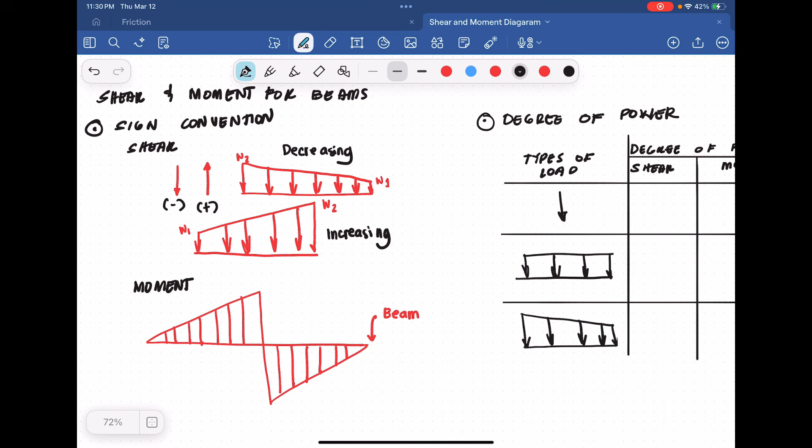Now when it comes to moment, what does it represent when we see this kind of figure? Let's say this is our beam or our horizontal axis. If we encounter a figure above the beam, it means it is on the positive side or positive area, and it is increasing in value, starting from 0 and going to an unknown value.

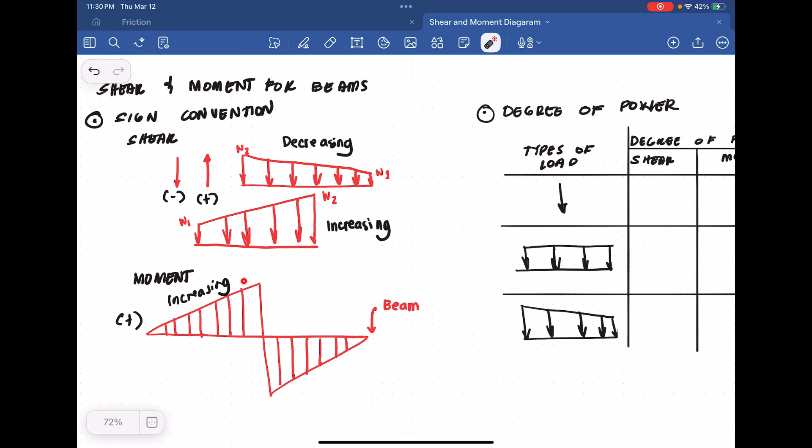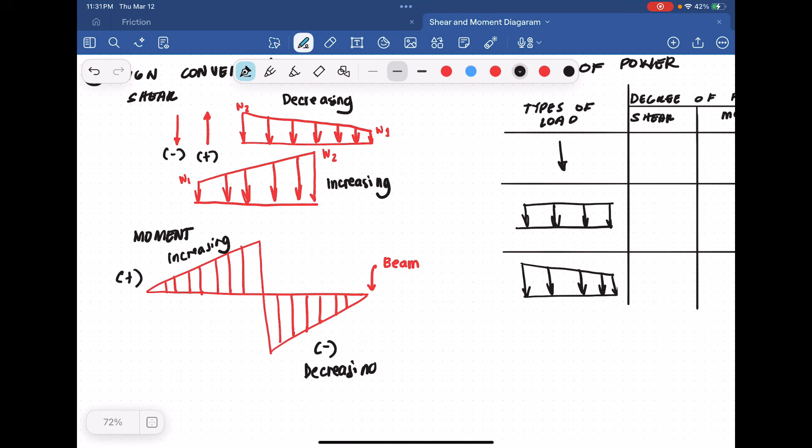While here, when the shape or figure of our moment is below the beam, it means our data is already on the negative side or negative area, and our value going from a higher value towards 0 means it is decreasing in value, heading towards 0. So that's our sign convention.

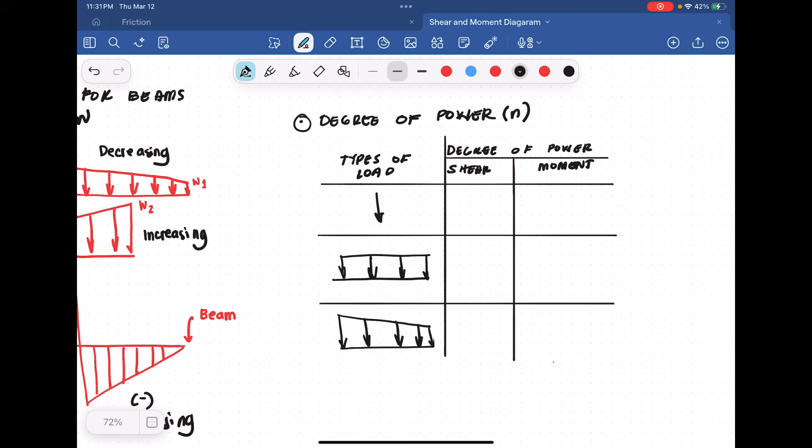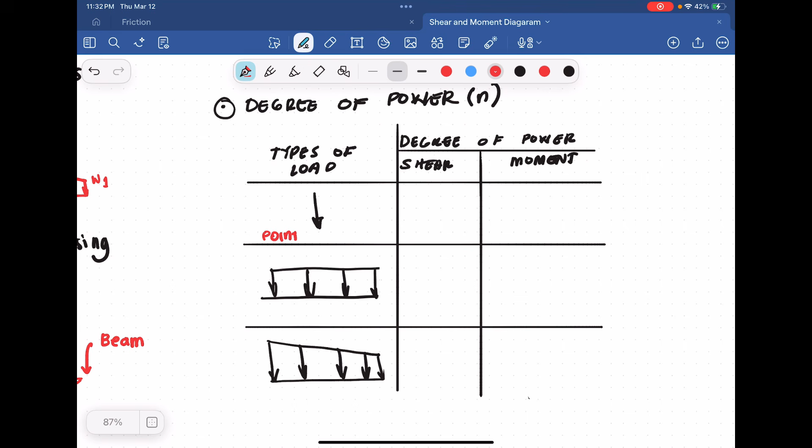We have here different types of loads. We have the point load, the uniform load, and the non-uniform load, which can be triangle or trapezoidal.

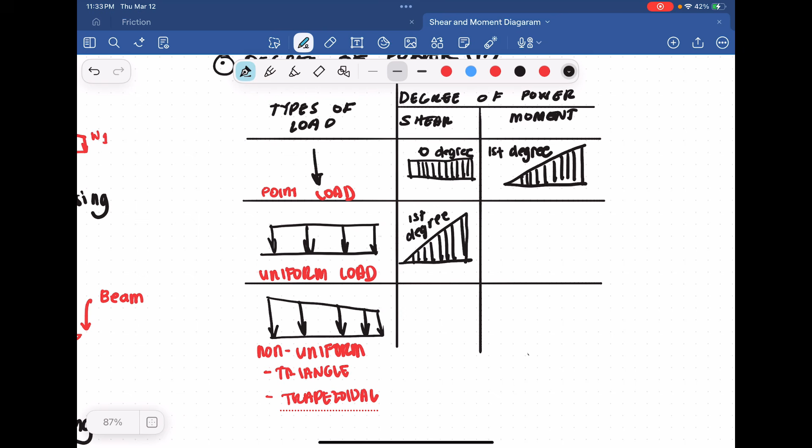While for moment, what we encounter there is what we call a spandrel, which has a curve. Spandrel starts at second degree for its value of degree of power.

Now, once we move to trapezoidal or starting with triangle, what happens there, for shear, is we are now at second degree of curve. And then, our moment is called third degree.

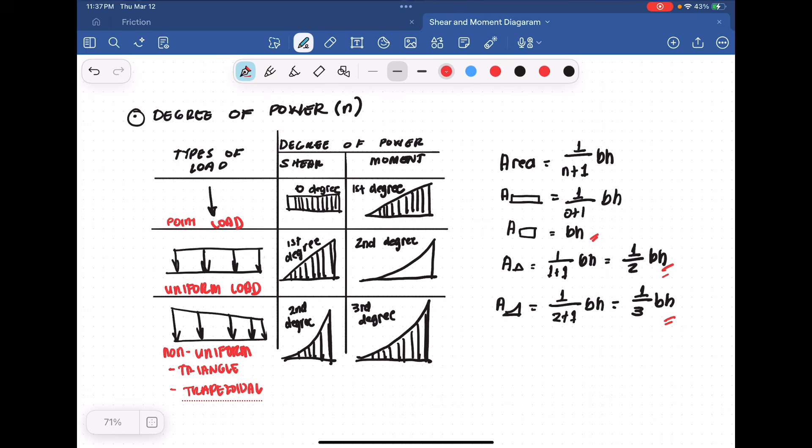So we identify which n we're using or what degree of power we're using. If the spandrel is second degree, the area we use is 1/3 base times height. That's how we identify the area of each shape.

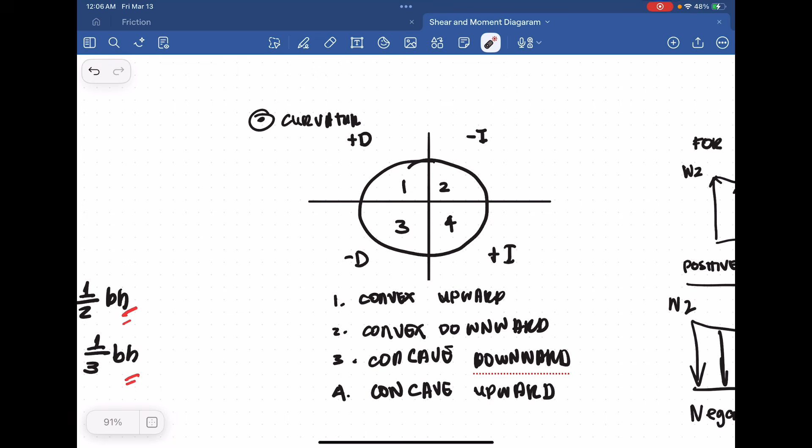For this one, yung sinasabi kong mnemonics na DD, it's because we have here positive decreasing. This one is negative increasing, negative decreasing, and positive increasing. Ma'am, paano po ba yun? Okay, so punta tayo dito kay shear.

First, kasi merong binibigay na mga problems or figures kung saan yun yung magiging basis natin kung paano natin ito-draw yung ating shear diagram. Itong mga ito na nakikita nyo, ito is based sa magiging result, based sa loadings given sa problem. So, ito naman is nasa shear diagram na tayo.

First, we have positive D, ibig sabihin positive decreasing. From a higher load, pababa yung value ng ating loads, pero ang kanyang given loads is upward yung arrow niya. So, nakabase yun sa arrow, but the value is decreasing. Example, meron tayo dito 20 na value and this one is 10. So, the value is decreasing, pero nasa positive part or positive area yung ating diagram.

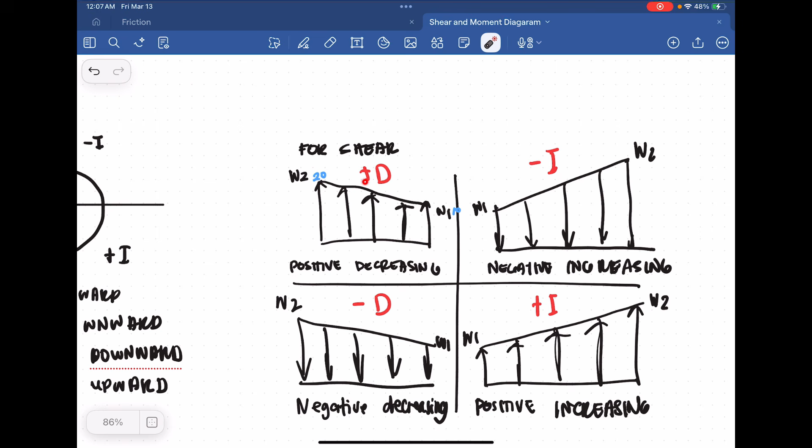Next is we have the negative increasing. Ibig sabihin, mula sa value natin, pa-increase siya, papunta siya sa 20. Pero ibig sabihin ng negative, it's that yung loadings natin, possible na pa-downward ang kanyang direction. Meron tayong downward force.

Next is we have the negative decreasing. Ibig sabihin, from higher value, we have 20 for example, and then meron tayong value na 10 para sa lesser value. Nagiging negative decreasing siya kasi pababa yung value, at the same time, downward din yung force natin. While in the positive increasing, ang ating force is upward, and at the same time, ang ating value ng loads is from lower to higher value.

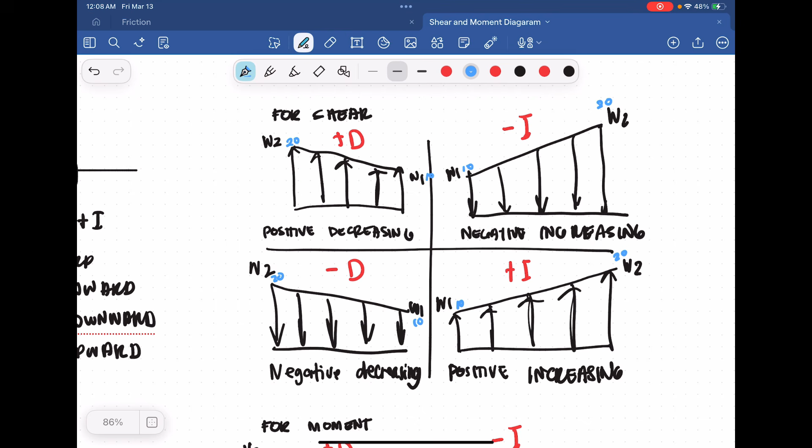Ngayon naman, if after natin ma-identify ang ating shear, pupunta na tayo or kino-compute na natin ang moment by still solving the area ng nasa shear natin. Pero ano ba ang mga magiging part ng ating moment diagram?

Sa ating moment diagram, if pasok siya sa ating positive decreasing, ganito ang magiging figure niya. This one represents yung beam. Nagiging beam yung, kumbaga, yung pinaka-axis ng ating drawing. Ibig sabihin, dito sa positive decreasing, yung ating figure is nasa taas ng ating beam, and at the same time, yung value natin is decreasing. For example, meron tayong from 10, and then meron tayong value na 5. For example lang po yung mga nilalagay kong value. We still have an example para mas lalo nyo maintindihan.

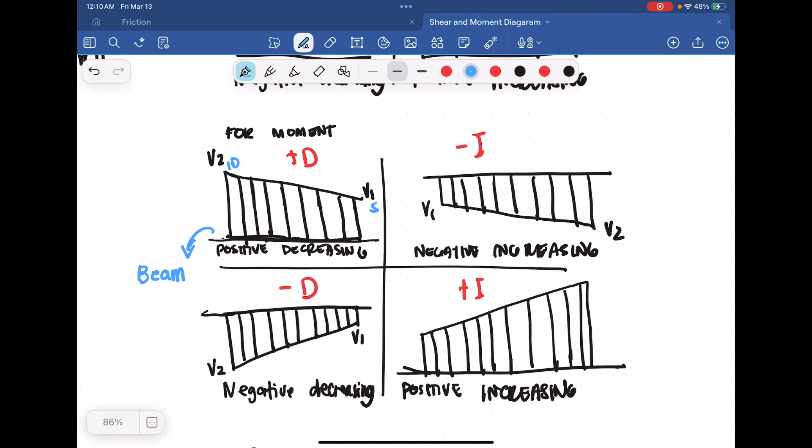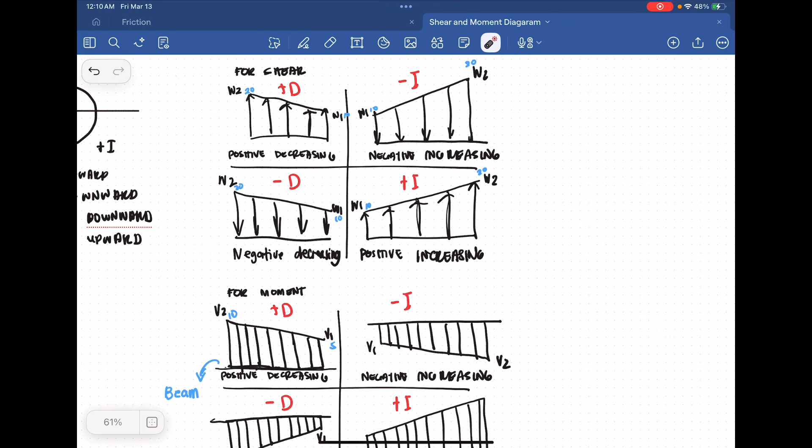At kapag ang figure natin, nakabase tayo sa negative increasing. Therefore, ang magiging value or drawing natin for a moment is magiging negative increasing. Pero ang ating figure is nasa below beam na yung sample natin. While here, sa ating negative decreasing naman, nasa below beam din ang magiging figure natin. If ganito ang figure natin sa shear, ito naman ang equivalent figure niya pagdating kay moment.

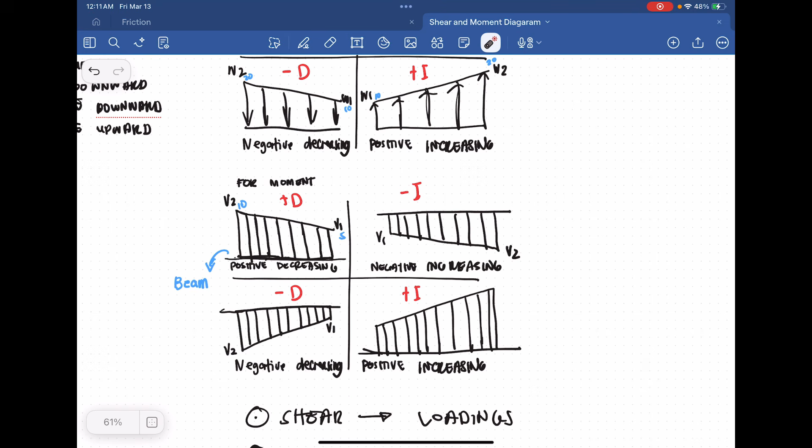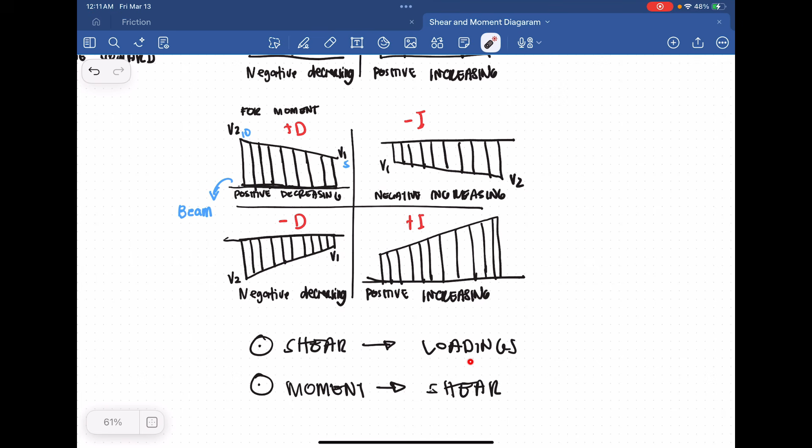Pag kay shear is naka-positive increasing tayo, ang ating figure for moment is nasa above beam from lower value to higher value. So, ating shear diagram is nagbe-base tayo doon sa loadings o doon sa figure o sa problem na sinosolve natin. At para mapalabas natin ng moment diagram, magbe-base tayo sa area na nako-compute natin kay shear. Ayun yung pinaka-concept natin sa ating shear and moment diagram for the computation.

We will still be solving, or I will still give you 2 to 3 examples para mas malinawan tayo how to compute shear and moment diagram. I hope you understand the concept. Yes, medyo mahirap siya intindihin by concept lang. So, I hope the example problem will help us to understand better.